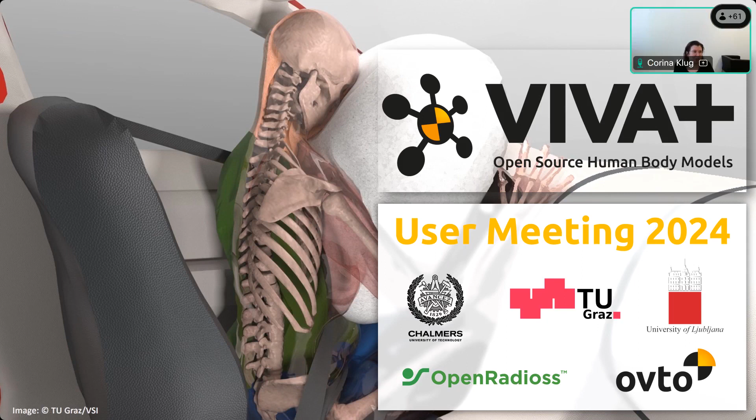So also welcome from my side. It's great to see so many of you in this meeting. What we have prepared for today is, at first, we will give you an introduction into the VIVA Plus models and the basic ideas behind them. Then we will show you more about the infrastructure around the models, especially the VIVA Plus validation catalog and OpenVT. Then you will hear some updates from the VIVA Plus developer team on new validations and also upcoming updates of the models for the next release.

After a short break, we will go more into applications of the VIVA Plus models with presentations from OpenRadioss on the VIVA Plus simulations in their open science framework. Then we will hear from Karin Brolin about the application of the VIVA Plus models for equestrian safety, and from Manuel about a comparison on average male and female response in frontal crashes. Christoph will then talk about e-scooter injury risk with focus on passenger car collisions. Unfortunately, we had to cancel the last presentation on the muscle model for injury evaluation.

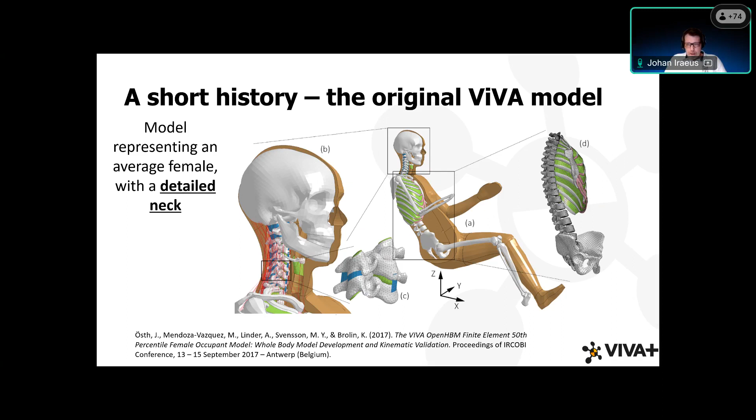If we then swap to the VIVA Plus models, when we started that, we kept the cervical spine because that was a good model, but basically threw away the rest of the model and remeshed everything. So here instead, the focus is on all of the body and injury risk across all of the body. But I will show you in the coming slides that we have some special focus on some body parts also for this model.

As with the original VIVA model, we are focusing on the vulnerable female population. And one way that we do it is that the base model in our development is an average size female.

All the validation, the post-processing tools, and the documentation are licensed as open source, and you will see more about that in later presentations.

We have detailed skeletal models that enable tissue-based injury criteria. What we mean by tissue-based injury criteria is that we look at the stress or strain in the tissue, which could be bone or something else, and try to relate that stress or strain to injury risk, compared to something you have in a crash test dummy, like an accelerometer or force transducer, where you use force or acceleration to evaluate injury risk.

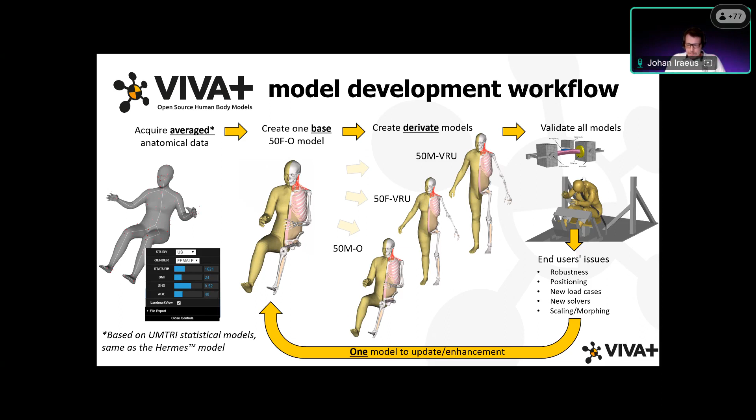Also the bones are based on statistical shape models of females and males. So when we morph from a female to a male, we also take into consideration any statistically significant differences between males and females.

We have some body parts that we care more about than others when we evaluate injury. One of these is the rib cage, so here we have a detailed rib cage. The ribs share the same modeling strategy as the SAFER HBM, so you would get similar results for rib fracture risk - not exactly the same, because we have different modeling of the internal organs and soft tissues, but they share similarities, whereas the costal cartilage and sternum are modeled slightly differently.

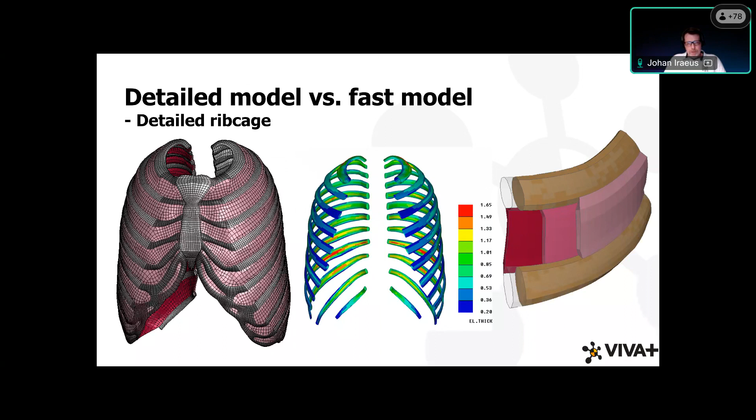Another area of interest is the lower extremities. If we start looking at the right side, we have the model of the femur, and here we are not using shell elements for the cortical bone - instead we're using solid elements. As the cortical bone in the femur is quite thick, we can afford to have 3 solid elements over the thickness.

The spongious bone here is also modeled with solid elements, as you can see, the brown one. And something else I can mention, we are using a pure hexahedral mesh here, so we don't even have penta elements here. We have spent quite a lot of effort on doing this mesh.

The upper extremities are modeled in a similar way as the lower extremities, but here the cortical bone is a bit thinner, so here we can only have 2 elements over the thickness. And obviously, I think all of you know that the time step of the model is what sets the number of elements we can have over the thickness. And the current time step of the model is, I think, 0.4 microseconds or something like that. So it should be quite similar to what is used in the industry.

One difference here is that for the upper extremities, we don't really have any validation, because that was not the focus of the VIRTUAL project where most of this has been developed.

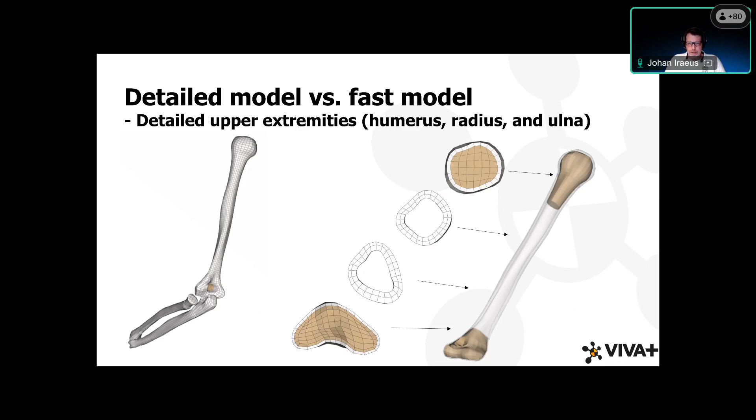To do repositioning of models, and also to do positioning of the model into a vehicle environment, for example, we have metadata both for PIPER and for ANSA. The metadata for PIPER you can find on the OpenVT platform, which we will show you where to find later. When it comes to metadata for the ANSA preprocessor, you can ask for that from your local ANSA supplier.

We have, as I said, spent quite a lot of time on meshing to ensure a good mesh quality. We have a set of element criteria, and 100% of the elements fulfill these criteria. And that is both for the baseline model, the 50th percentile seated, but also for the morphed models. So after the morphing to the derivative models, we spend some time fixing the element quality in those models to fulfill all the criteria.

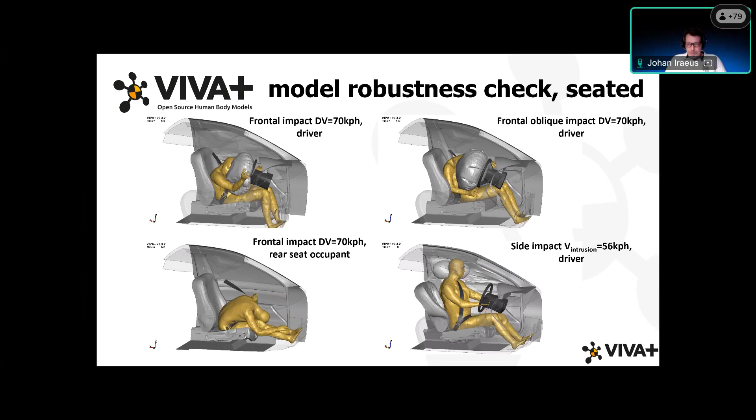Going down to the lower row to the left, we have a frontal impact, still a frontal seat, but this kind of mimics a rear seat. So we have removed the contact with the instrument panel and the airbag. Also this is 70 kilometers per hour. And then we have a side impact with an intrusion speed of 56 kilometers per hour. And we always run these robustness load cases for every small change we do to make sure that we haven't introduced anything that makes the model unrobust.

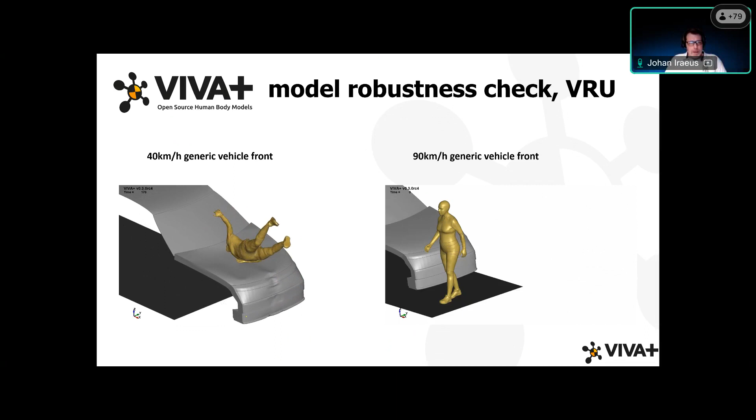Then we also have the robustness check for the standing models. I only showed you one model in the previous slide, I think it was the female, but obviously we run it for both the female and the male model. So here we have a 40 kilometers per hour impact to a generic vehicle, but we have also pushed this model all the way up to a 90 kilometers per hour impact, which is very severe. This one actually sometimes crashes, but very late, around here, so very late in the sequence.

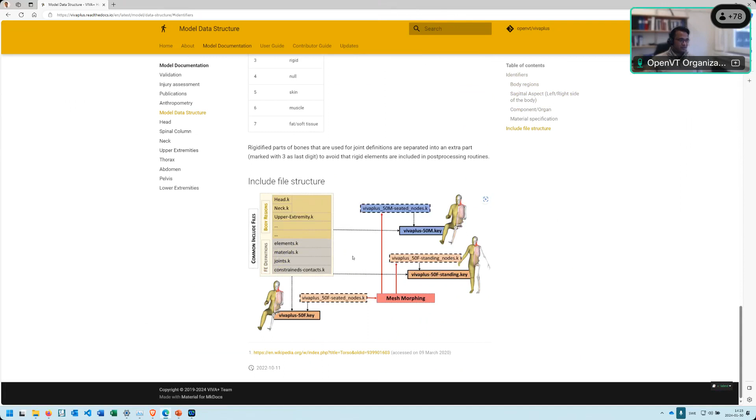And the files are structured so that all the models share most of the files as common include files in LS-Dyna. If you go back to the home page, this is where you can download the models. I downloaded just before here, and this is what you would see when you download. You would have a folder called model, where you can find the 50F seated, 50F standing, and the average male seated and standing. To show you the file structuring, if I open the seated female, we would have a main file called VIVA plus 50F key, and the nodes corresponding to that.

As I mentioned, there's a common folder which holds all the other definitions of the model, and these definitions are shared among the standing, seated, and all the other morphed models. Johan mentioned the pre-processing. This is where we hold the metadata for PIPER and so on. And in the post-process, you would find the metadata you would need to perform calculations with the dynasaur library.

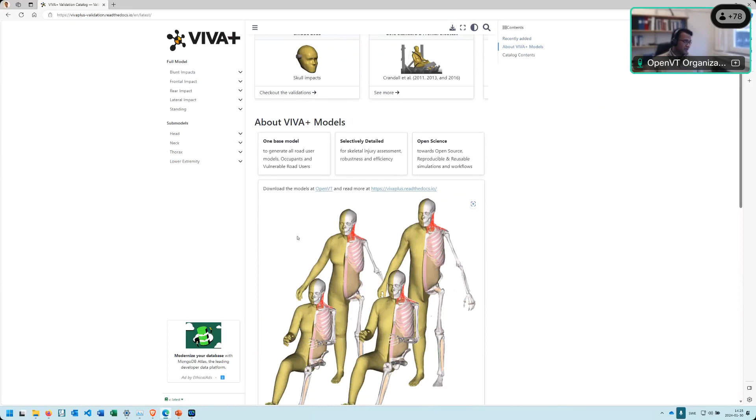Coming back to the documentation, if I click on catalog here, it takes you to the validation catalog, which is also published on Read the Docs, similar to the common documentation. We built all our validation using Jupyter notebooks and have them openly available on OpenVT. So we'll click this link. It takes you to the repository on OpenVT, where we keep all the validations and also the models. And here, if you click catalog, you'd find all the load cases we have.

Let's take, for example, one that Johan will be showing us later, the frontal impact experiments. You would find the corresponding files here, Crandall 2011 frontal. We've structured it so that the environment is in this folder called env, and the Dynasaur files and associated files are under Dyna. Here we have one folder each for female and male. If I click the female 50F and open the main file, you can see it refers to the environment files and all the other definitions here in the folder.

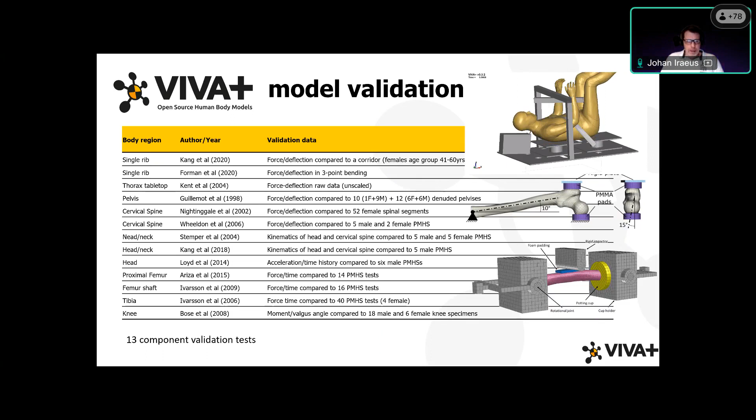So we have divided here the validation load cases in what we call component validation load cases, where we have either an isolated body part, as you can see here, for example, a femur, or where we exercise only a limited part of the model, as we do here with the Kent tabletop that you can see in the top, where we pull a belt across the chest. We have 13 of these component validation tests. And then we have full body validation tests. We have 15 of these, where we basically exercise the whole human body model at the same time.

Here we can also see some details how these validation setups are modeled. So in all cases, if we need to reposition the model, we do that during the first 300 milliseconds. We also have a critical damping at that time. And then we ramp down the damping from 300 to 350 milliseconds. And then from 350 milliseconds and forward, we apply the crash pulse. So here we have a couple of examples, one frontal impact and one side impact.

So let's have a look at the validation load cases in the final format. And this works really bad now in the presentation mode. So the Jupyter book that Jobin showed earlier, let's go in and check some of the validation load cases here.

So I click this link, and then we get here. So we can see here we have some recently added. We have the gold standard that we saw an animation of in the PowerPoint, and the near side sled test, that was the other animation. So I will show you these 3 tests. If we start with this one, the gold standard 2.

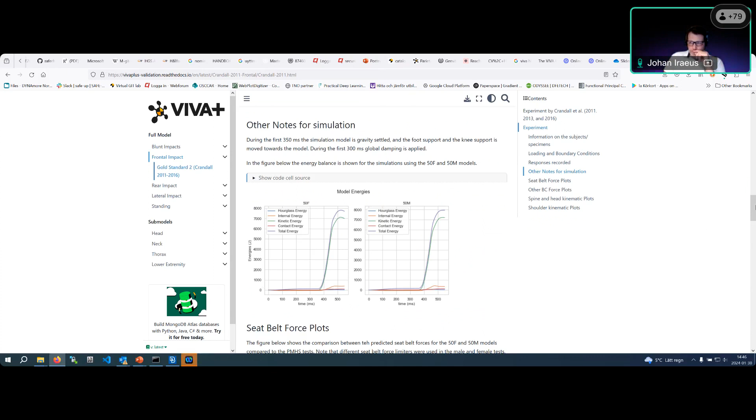Then typically the first section of the result is the model energies, so we can check that they look reasonable, so we don't have an error when we rerun it. In this case, the output data, we have the seatbelt forces, so that would be the external forces. And typically we use red colors for the 50F, the average female, and blue colors for the average male. And then correspondingly here we have the test. We have 2 tests with female cadavers and 2 tests with male cadavers. So they are also red but dashed and dotted.

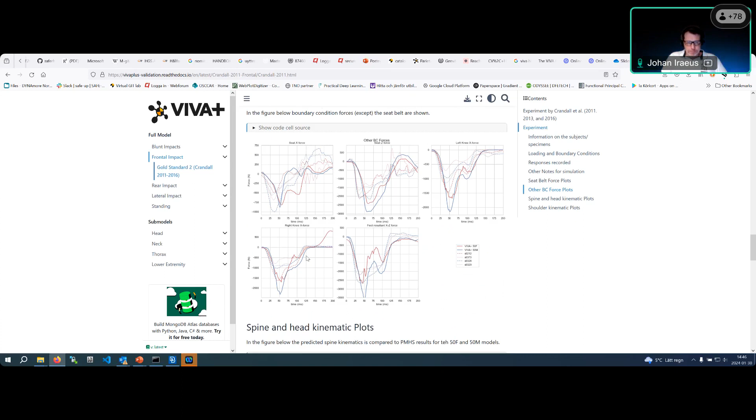So then we can compare, and here we can also see in this setup, they used a higher force limiter level for the males than for the females. So it's actually a combination of 2 studies that we are presenting together. So we have seatbelt forces, we have other boundary conditions like seat force, X force. We have knee impactors, so we have the knee forces and the feet. So after that, when we have ensured that we have reasonable representation of the boundary conditions, we can look at the kinematics.

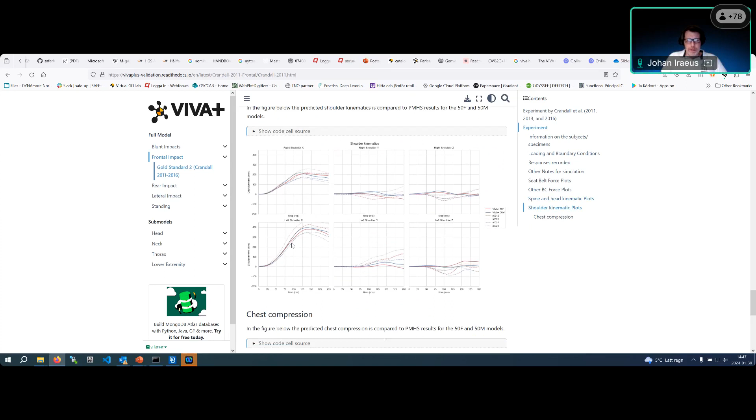So here we have a comparison of the predicted kinematics, in solid lines, with the kinematics from the tests. And here we have different levels of the spine, the head and the spine. And then in the second plot, we have the left and right shoulder in X, Y, and Z. And then finally, in this data set, we also had Vicon markers on the chest, so we can also compare the chest compression. So the orientation of these plots corresponds to the orientation of the Vicon markers. So that is the validation for this.

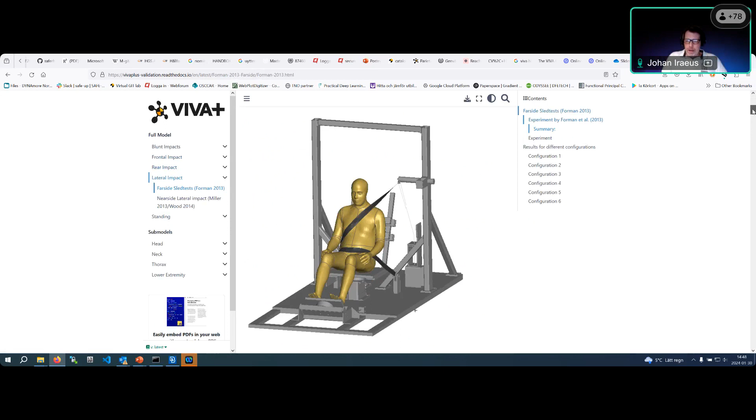We can go to the next one, which is a rear impact. We are not going to look at that actually. We will move here to a far side impact. Similar layout here. It's another setup. So far side, so the pulse is directed so the occupant will move lateral or oblique, lateral oblique in that direction. And here 6 different configurations have been simulated. And those are similar to what has been reported in the literature with other human body models.

We have some information about test cadavers. Again, we look at the model energies, and then we compare the signals that we have. So in this case, we have shoulder belt force, and lap belt force down here. And then we have a lot of kinematic signals compared to the test. In this case, we have gray corridors because the validation data was only run for males, so we don't have anything to compare the female model to.

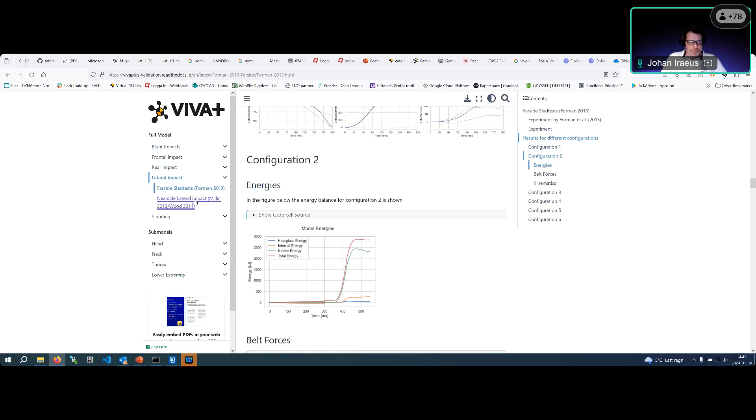Yeah, and then we have some head displacement and so on. And then we come to the second configuration. So a lot of results here. Then we can also check the near side lateral impact. Similar here, we have description of the validation load case, the loading, the positioning of the VIVA Plus models.

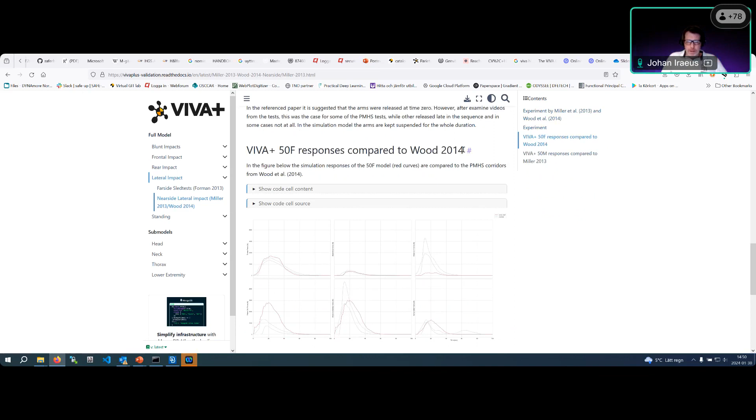In this case, we have less information from the test. They basically only recorded the force and deflection of the load cells. We can see that we have a number of load cells here impacting different parts of the body. And here we have two different tests. We have Wood 2014, where they run a cadaver test with females.

Compare here, we can definitely see here that this part, the text should be, we need to update the text here. But here we have the greater trochanter of the pelvis, and here we have the iliac wing, and we can see that they are not matching very well. The total force on the pelvis, however, matches quite well. So either the model cannot capture this distribution, or one of the plates, these impact plates, can be a bit misplaced.

And then similar for the male here in another test, that's Miller 2013. And we also had a force versus time, actually, sorry, I said displacement before.

Mate, you're next here. Yes.

Sure. In addition to all the validation cases that Johan already presented, we also have the validation for the knee joint. We did this validation based on the Bose 2006 and 2008 experimental data. So it simulates the impact of approximately 40 kilometers per hour. And these are the results of the simulation.

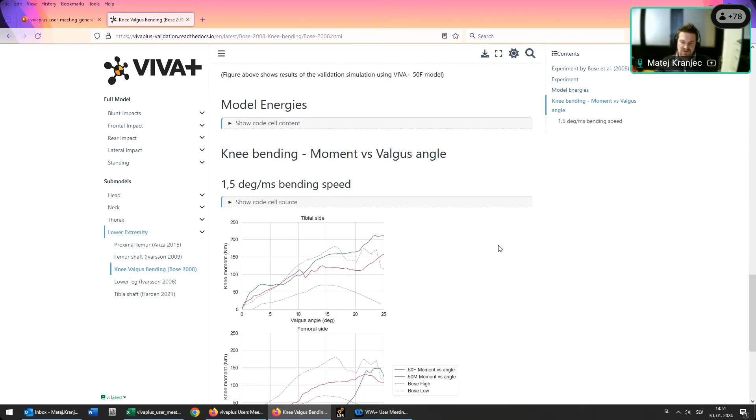So based on the kinematics, which we only have on the pictures, it looks quite similar, but also comparing the bending moment versus the valgus angle, it looks quite okay. So there is a little bit of difference if we are measuring on the tibial side or on the femoral side, but the average moment that we get from the model at the validation looks quite nice and inside of the corridor that we are comparing it to.

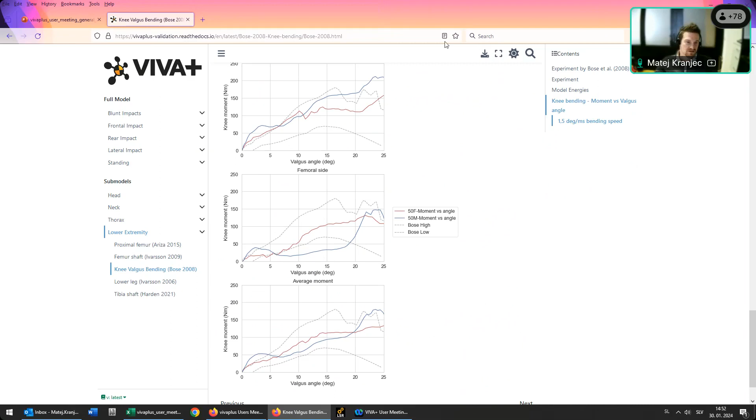But more about the validation of individual components of the lower extremity and the pedestrian load cases, I would like to give the word to Nico from TU Graz. Thanks. I will also share my screen.

Yeah, so I would like to give a short overview of the validation of the lower extremities and some full-scale pedestrian impact validation simulations. So basically, we can divide the method into two steps, one on the component level and one on the full scale level. I think Johan had also introduced us to this

two-stage validation. In the first step, we have to model the test setup where we can apply loads to single bones or extremities. And it's important to model the full affected setup in order to account for inertias and the representation of boundary conditions. In the second step, we simulate each single test with the specific displacement time curves. In most tests, these were not equal between the tests. And in the third step, we can compare the force time responses from the model to the experimental data and calculate our injury risk curves for the model.

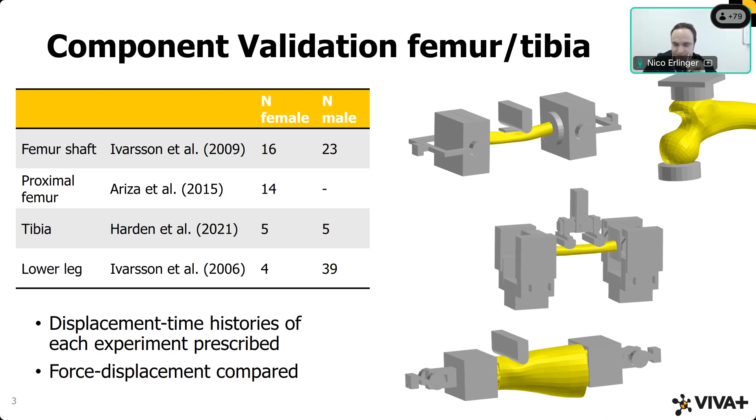For the pedestrian to vehicle impacts, we used three PMHS studies where Paas included one female and four male subjects with a vehicle front of a Renault Megane. Forman conducted three tests with a generic sedan-shaped buck, and Snedeker had done five tests with a generic vehicle front.

Prior to the impact simulations, the VIVA Plus models were positioned based on an equal angle approach, and some basic anthropometric scaling was applied, taking the height and weight of the PMHS into account, as presented by Paas in 2015.

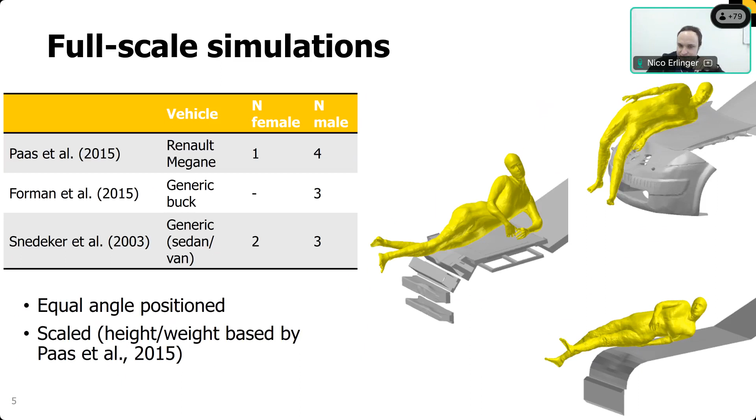On the full scale level, the kinematics of the VIVA Plus model were found to be in reasonable accordance with the experimental results. I've put some examples here for the head trajectory for test number five by Paas. Overall, a fair correlation was obtained by the objective ISO rating score for the simulations from Paas.

I've also included a diagram of the kinematics of the head and the pelvis of the replicated tests by Forman.

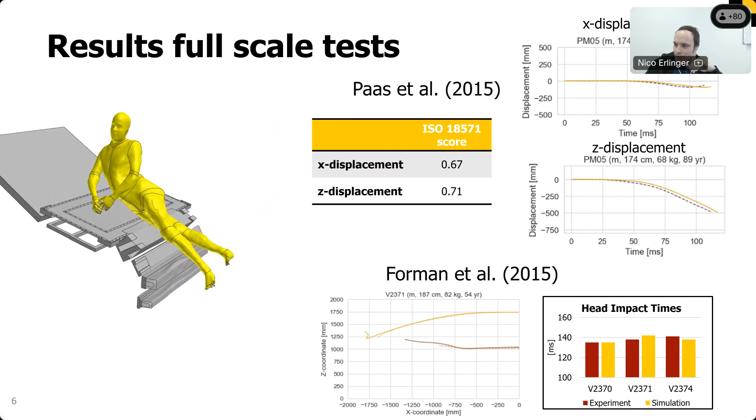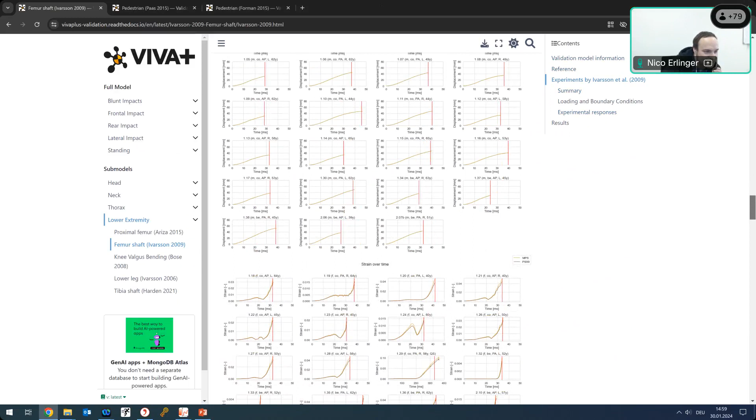I also would like to do a quick change to the VIVA Plus validation catalog. They are all singly replicated tests with force-time curves, CORA curves, and strains in there. Finally, we get our injury risk curves. And also for the full scale validations, we have all our simulations in this catalog.

That should be all from my side. So thank you.

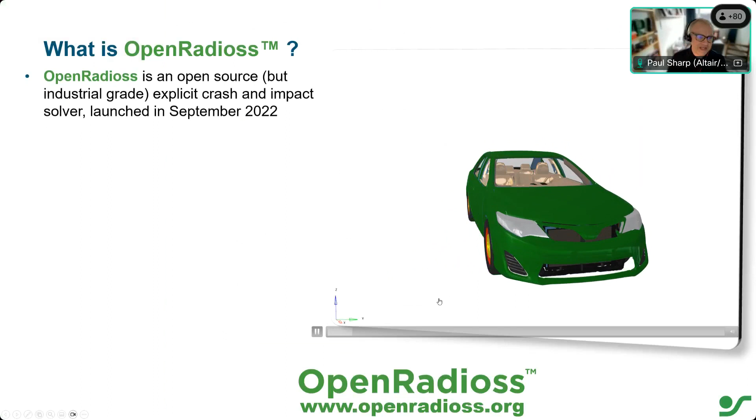So what is OpenRadioss? Maybe some of you have already heard of it, but you can probably guess from the name that it's an open source version of the Radioss crash solver. Johan already spoke to us a little bit about what open source means, so the VIVA Plus body models are an open source body model. OpenRadioss is an open source explicit crash code, but it's what we would call industrial grade. It's built from basically the same source code as the Altair Radioss solver, and it was launched as an open source version in September of 2022.

As Johan discussed, this is a very similar structure to VIVA Plus. It has publicly accessible source code, so you can view it, modify it, and enhance it with your own changes. There are also pre-compiled packages available as executables, released daily for both Windows and Linux, in single precision, double precision, MPI and SMP versions. If you don't want to get involved in modifying the code, you can just download it and run it.

There's an active community of members across both industry and academia, all committed to improving the code and driving innovation. Several research advancements and best practices are shared via the GitHub forums for the project, and we also have our own virtual and in-person user meetings. We have a steering committee of members across academic institutions and industry, including industry gurus, who are guiding the development of OpenRadioss to meet the latest challenges facing users in industry today when running an explicit crash code.

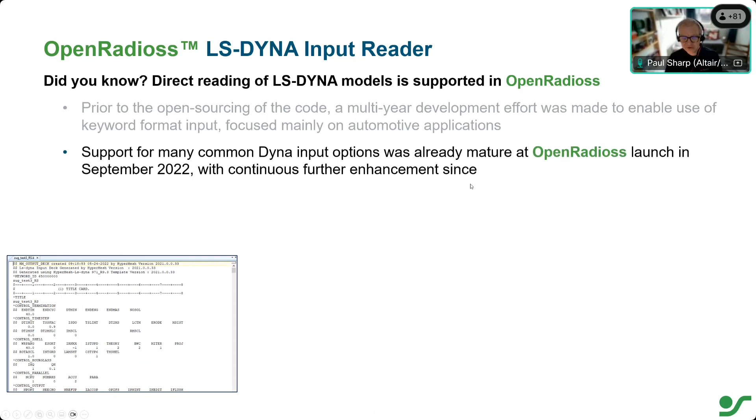One aspect that even if you've heard of Radioss or OpenRadioss you may not be aware of is that it's actually capable of reading and running LS-Dyna format models as they come, as a key file, a .k file. This was available even prior to the open sourcing of the code. It was a multi-year development effort made by Altair to enable use of the keyword format, focused mainly on automotive applications, the most commonly used materials and properties in that field. Support for many common Dyna input options was already mature at the time of the OpenRadioss launch, and there's been continuous further enhancement, including contributions specifically aimed at helping what we're talking about today.

There are a number of publicly available vehicle example models you can find from NHTSA, for example the Taurus, Neon, Yaris, Camry. You can just take those Dyna input format models and run them in OpenRadioss right now, with no changes to the input. We've got some examples on the OpenRadioss Confluence pages, including links to those, but also other Dyna format examples like this simple tensile test shown here.

If you have access to the Altair Radioss reference guide, it serves as the reference guide for OpenRadioss too, because the solvers are basically the same. Within that, there is a list of the supported LS-Dyna keywords.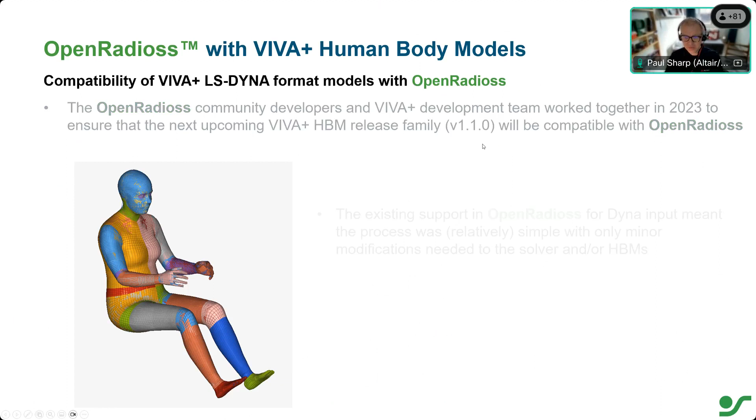So, using OpenRadioss with VIVA Plus human body models - the community developers at OpenRadioss, along with the VIVA Plus development team you've already heard from today, worked together over the last 12 months to ensure that the next upcoming HBM release family, version 1.1 as it stands, should be fully compatible with OpenRadioss. By that, I mean the Dyna input format will be compatible with running in OpenRadioss.

As I've already mentioned, we've done a lot of work to support Dyna input in OpenRadioss, so that process was relatively simple. Some enhancements were made to OpenRadioss based on its behavior with the VIVA Plus HBMs, adding some material and property support and making modifications here and there. Also on the VIVA Plus side, they collaborated with us to make sure the modeling choices made in the next release were best suited to working with OpenRadioss. As I've mentioned, we don't necessarily support every Dyna input format, so there were a few changes to sensors and functions to ensure the model would work cleanly with the OpenRadioss solver.

So how do you do it? How do you run your VIVA Plus HBM in OpenRadioss? I've got a very short video here where I've already downloaded the VIVA Plus test suite - we've seen that in the validation tests. Here we've got the seated 50th percentile female with the Kroell sternum chest hub impact, and we can see we've got the keyword format file there.

I've opened the OpenRadioss GUI, which is available from our Confluence pages. I pick the keyword file up, and I'm running single precision here, though double precision is also available. I'm picking my number of processes, so here running in 4 processes MPI. Add the job - okay, so this is just an existing Kroell 1971 validation test. It comes into the solver window, and we can see it says right at the start that it's reading an LS-Dyna input format model. We get a bunch of warnings, but we don't need to worry too much about those.

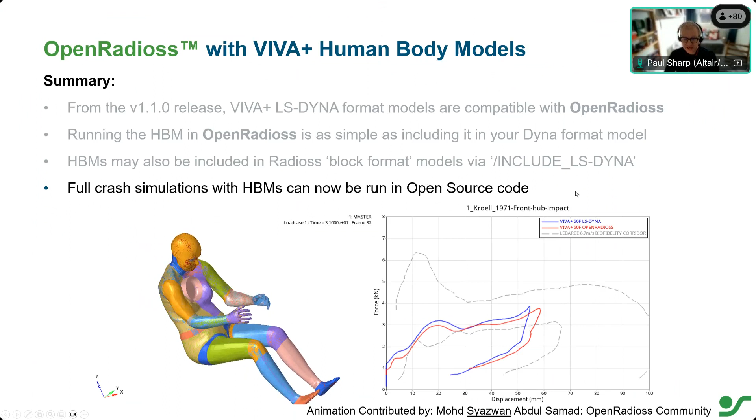But now you can run full crash simulations with human body models in open source code. And just one final slide here.

This was actually done by another member of the community, where Johan said the one case that had been run is this one. So Mohd from the OpenRadioss community ran this and compared it with Dyna using the available Dyna results, and you can see that we get reasonable correspondence there with no specific modifications to the model, and the dotted lines are the biofidelity corridor, and you can see that both the Dyna and Radioss results are very similar in that regard.

And obviously there's more validation to be done, and I think we'll continue working with the Viva Plus team to do that.

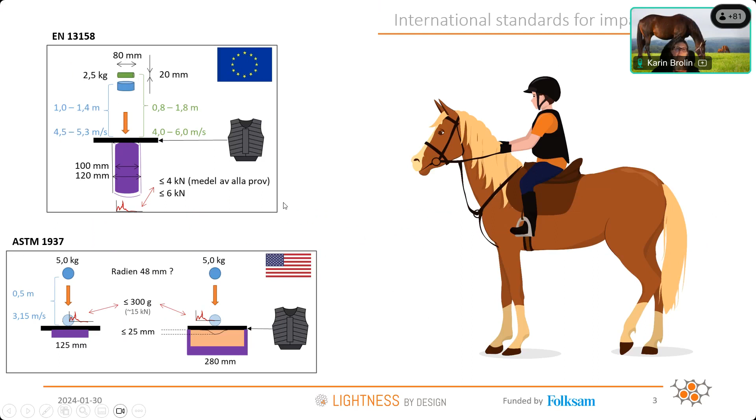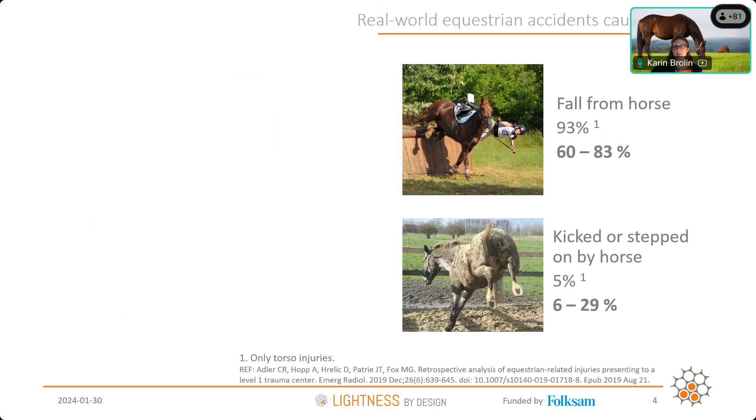But then we need to know also, of course, what are the accidents causing injury. So I looked a lot into different publications, but also into accident data. And we can see that falling from the horse causes the majority of the injuries. But people are also injured when they are kicked by a horse or if they're stepped on by a horse. And sometimes people fall from the horse and then they are kicked or stepped on, so there could be a combination of these also. So the question is then if there's any correlation between the accidents that occur causing injuries and these standard tests.

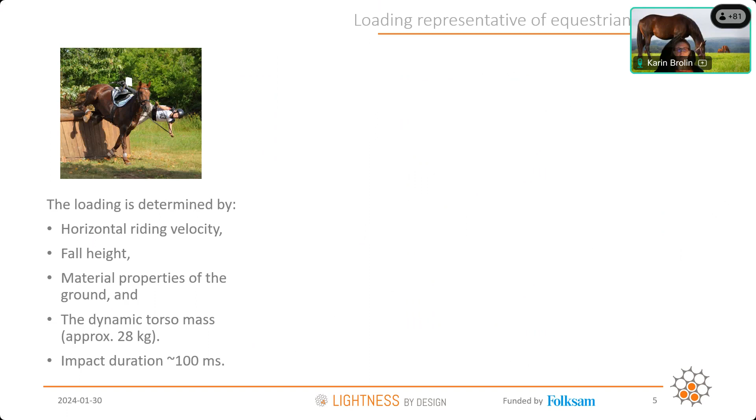So if we look at the loading in a fall accident, it's determined by, of course, the riding velocity, the fall height, the size of the horse, and the size of the rider, and of course the material properties of the ground that you're landing on. And then the dynamic mass of the torso, which is approximately 28 kilos for an average size female. And we have impact durations of around 100 milliseconds in these kinds of accidents.

If we look at being stepped on by a horse, there's no study showing any data of horses stepping on people or people-like materials. So I just took data on the force walking in different gaits on ground. And we have a spread from 2.5 to 14 kilonewtons under each hoof, and the maximum force occurs approximately after 150 milliseconds. And for being kicked by a horse, there's a study where they had a measuring wall installed in a stable. They measured up to 2 kilonewton forces with very short impact durations. The longest one was 50 milliseconds, but most were below 20 milliseconds.

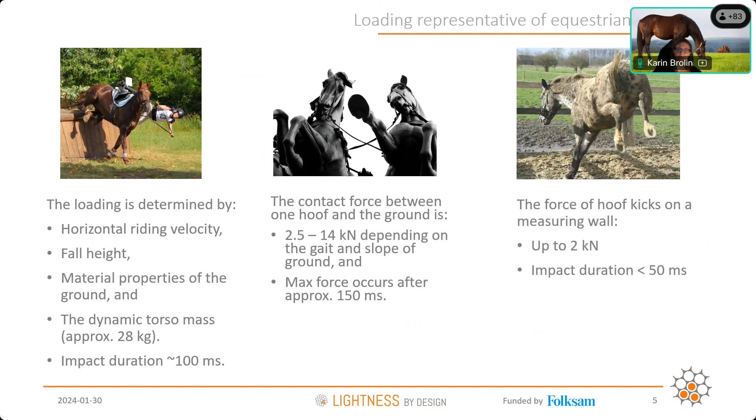So I did a simulation study trying to simulate some of these loadings. I used the VIVA+ average female model in LS-DYNA and looked at thoracic injuries by evaluating the dummy-type criteria, like the compression criterion, and the viscous criterion for soft tissue injuries. But I will focus here on using the strain in the ribs with age-specific risk curves coming from a publication by Larson. This is work from Chalmers that Johan, I think, mentioned briefly in the beginning. And here's an example of the risk curves. The ages I picked were 25, 45, and 65 years.

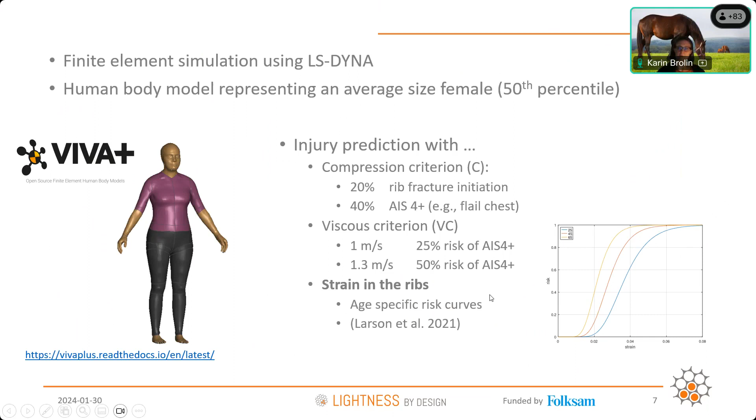And then I created a very simplified model of an equestrian safety vest. Essentially, it's an ideal safety vest because it has perfect fit. It's based on the geometry of the external surface of the VIVA model, so you could never put it on or take it off. It has a thickness of about 2.5 centimeters, which is measured from equestrian safety vests in the stores in Gothenburg. And we estimated material properties from literature for the energy absorbing foam material. And then we added an external and internal surface of nylon-type material.

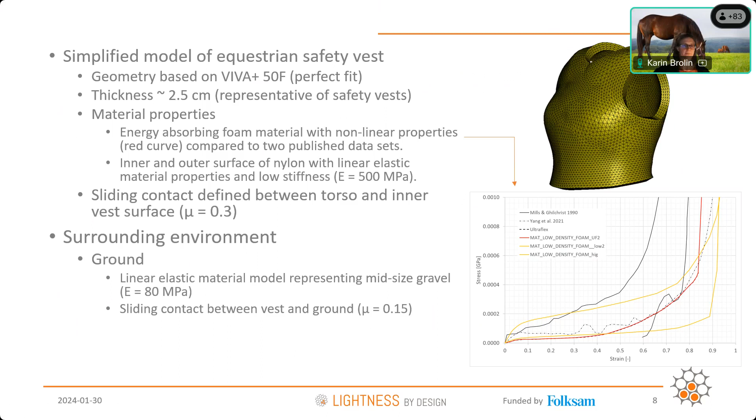And then between the VIVA model and the vest, we have a sliding contact surface. In the surrounding environment, we have modeled the ground, representing a mid-sized gravel stiffness. And there's also a sliding contact between the vest and the ground. And I have also modeled jump rails or fences with wood material properties.

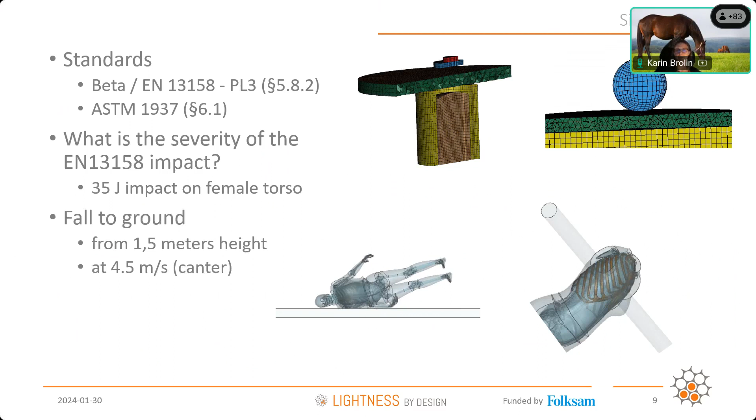So the simulations I ran were, first, I simulated both the standards. So that's the European standard, and this is the American standard. And then to get an understanding of what the European standard meant in terms of severity, I took that impactor and loaded a female torso. And then I simulated a fall to the ground from approximately 1.5 meters height in canter speed, which is about 4.5 meters per second if it's a slow canter.

And then instead of landing on the ground, people typically fall off landing on fixed jump rails or fences. So here I took the two different canter speeds, the lower speed of 4.5 meters per second and a higher of 9 meters per second. And I just used the chest model, not the whole VIVA model, to save computational time.

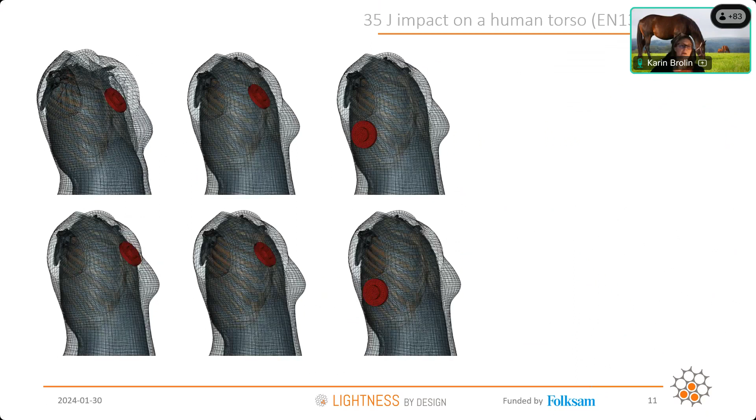And here again is just only the chest model with the impactor from the European standard. So it's mid-sternum impact, and then an offset impact and the lateral impact. And I did not predict any fractures for any of these load cases, so it's not a really severe loading. So instead, I thought, okay, what if we increase the impactor so that it somehow represents the dynamic mass of a torso? So instead of being 35 Joule impact, it's a 350 Joule impact.

And now in the mid-sternum impact, we predict no fractures for the 25 and 45-year-olds, and for 65-year-old, I predicted 0.1 rib fractures, meaning if we had 10 identical 65-year-olds, one of them would have a rib fracture. And the offset, we see more fractures, so half of the 25-year-olds would have a fracture. For 45-year-olds, they would on average have 1 rib fracture, and the 65-year-olds would on average have almost 2 rib fractures. And for the lateral impact, it's still a little bit worse loading.

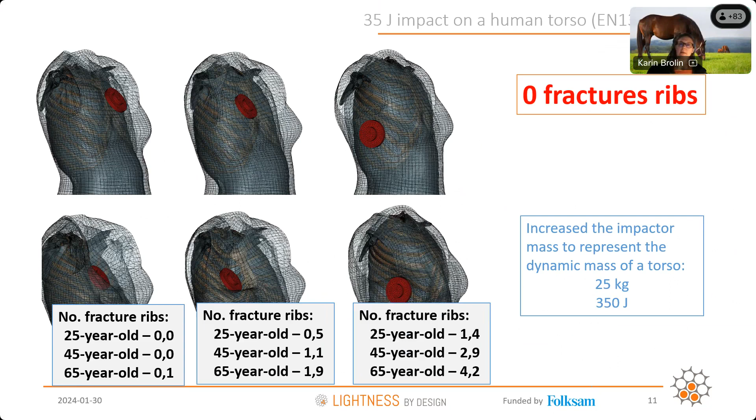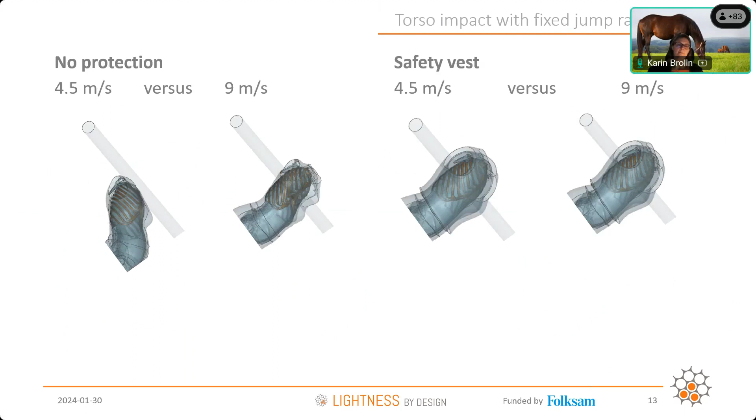And here we have the torso impacts for the fixed jump rails or fences. So the two left ones are different canter speeds, 4.5 and 9, and without the safety vest. The two to the right are with the safety vest. So here it's just inertial loading from the speed of the torso going into the jump rail. And here we see for the lower speed, we predicted no rib fractures, but for the 9 meters per second canter speed, we predicted rib fractures for all the different ages. And with the safety vest, that rib fracture risk decreased a lot. So for the 25-year-olds, from on average almost 4 rib fractures to 1.

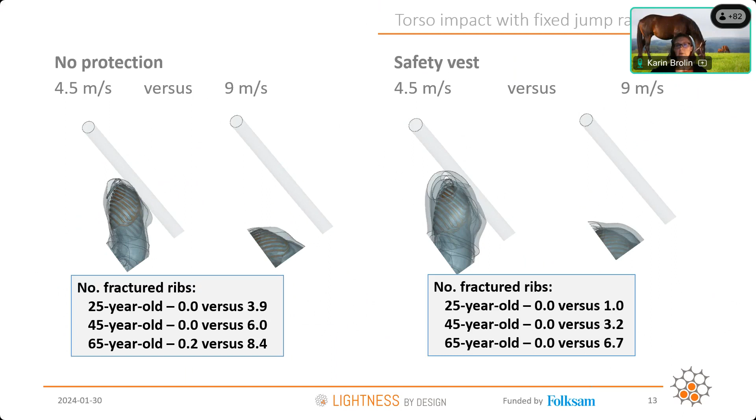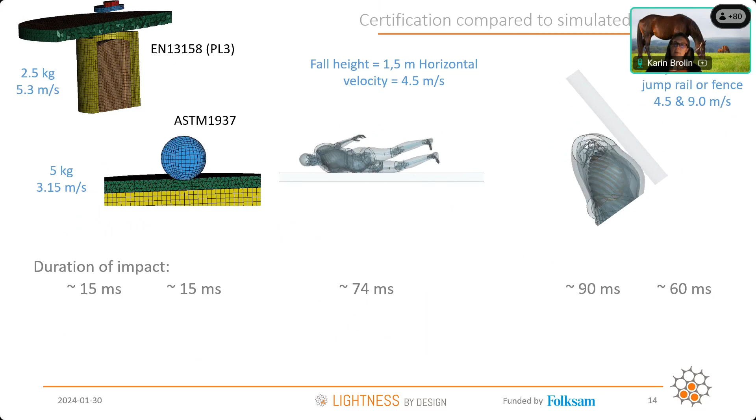So then the question is, the certification testing, the loading, which was the aim here, is it comparable to the accidents that we simulated in terms of loading of the riding vest? So the duration of the impact for the standard certification testing, it's about a 15 millisecond long force curve in time. For the fall, in this case, 74 milliseconds. For the jump rails, the lower speed 90 milliseconds, and the higher speed is a 60 millisecond duration impact. So we can see here that the certification testing is not really representative of these fall accidents that I simulated.

And if we look at the maximum compression of the vest itself, for the certification testing, the European was a 60% maximum compression. The US was 82%. In the fall accident landing on ground, we only had 38% compression, so much less. The 9 meters per second impact on the rail was the one that was closest, at 85% compression.

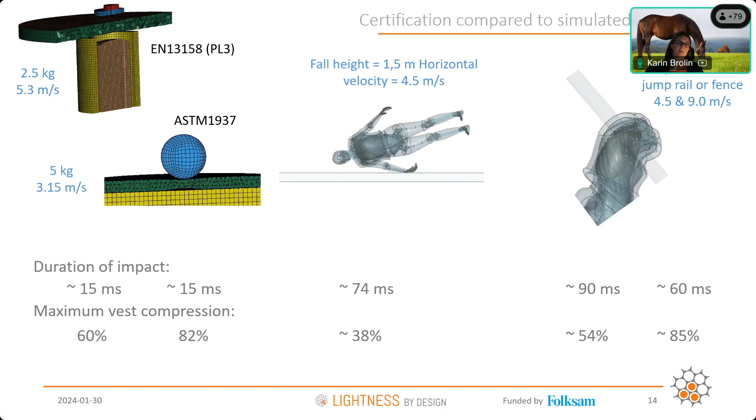So then, as a sort of summary, most of the torso injuries in equestrian accidents are caused by fall accidents. And if I look at the European standard and apply it to a female torso, it does not cause rib fracture. So I don't think that testing really predicts whether that is a good vest to protect from rib fractures or not. The impact duration of 15 milliseconds in that testing is representative of hoof kicks, but it's much faster than the impact duration of 100 that's representative of the fall accidents. And the impactor mass of 2.5 kilo is about 1/10 of the torso dynamic mass.

So then the question was, is the certification testing representative of loading in real world equestrian accidents? And our answer is no, it is not. So we are now working on a continued project where we will be using the VIVA Plus model to come up with good novel certification testing that could be more representative in terms of loading of the vest in accidents.

So shortly then, what my VIVA Plus user experience was. It was numerically robust for all the load cases that I simulated.

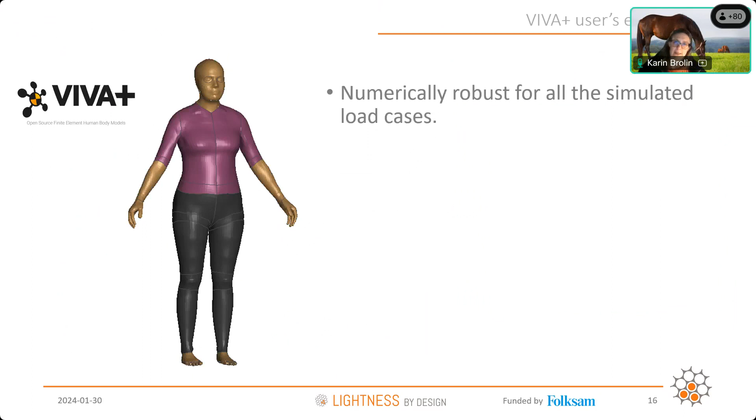A big plus for the strain-based rib fracture risk that was really useful for me, and one of the major reasons that I chose this model for the simulations.

As I mentioned, for some of the load cases I only used the torso model. And that created a little bit of headache or manual work to get the model running. It was not very easy to just remove parts, and then I got some numerical instabilities until I fixed it.

And it was not possible to run the post-processing scripts straight on to get the rib strain predictions that are supplied on the VIVA Plus web pages. So I had to do my own scripting for post-processing. But I will definitely use the VIVA Plus again, and I'm open to any questions.

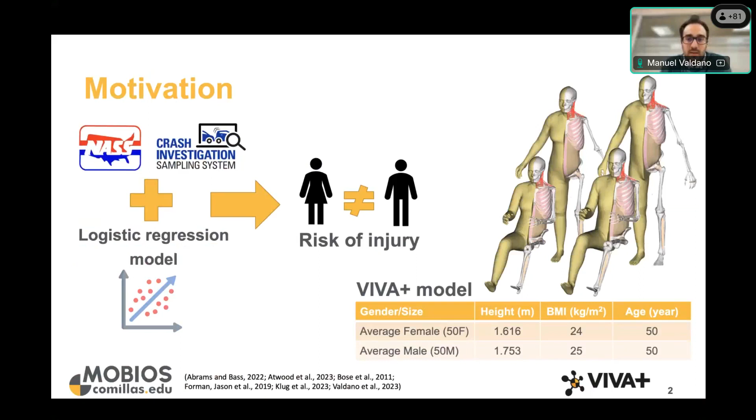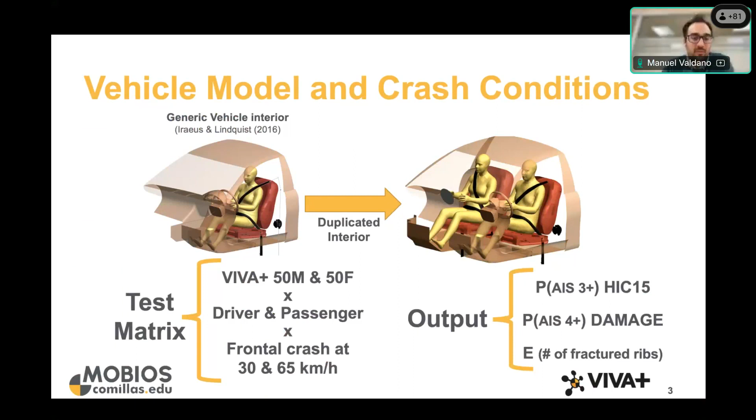Here you can see a video from the crash at 65 kilometers per hour. On the left-hand side of the slide, the female model in the passenger position and the male model in the driver position, and on the right-hand side, the male model in the passenger position and the female model in the driver position. Okay.

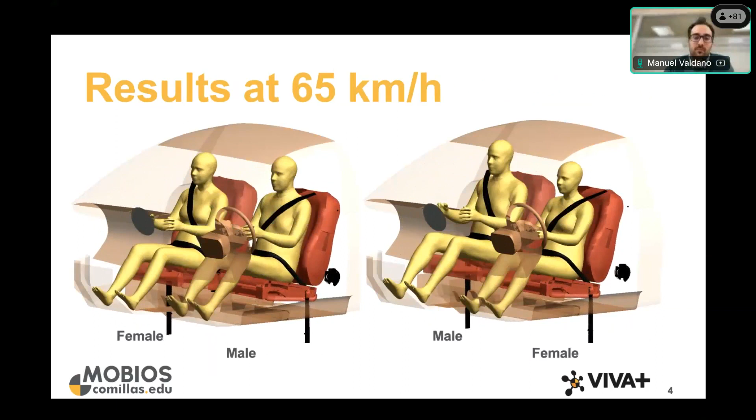Going to the results, I will just focus again on the 65 kilometers per hour simulation. On the left-hand side of the slide, you can see the probability of sustaining an AIS3+ injury from HIC, for both driver and passenger positions and the occupants analyzed. As you can see, passengers are more susceptible to this kind of injury. For drivers, females have a larger risk, and for passengers, the males. For DAMAGE, you can see a similar trend, but in this case the female driver occupant has a larger risk of sustaining an injury.

Analyzing the video from this crash, you can see in the bottom right-hand side of the slide there is a sudden rotation of the head after impacting against the airbag, resulting in this larger risk, because this rotation was not observed in the other simulations.

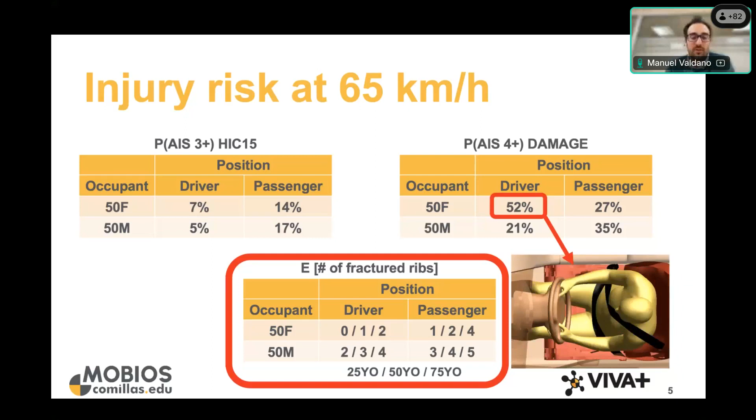And lastly, for the expected number of fractured ribs, we calculated this number for a 25, 50, and 75-year-old occupant. As you can see, this number increases as the age increases. Again, passengers were more susceptible to these injuries than drivers, and male occupants were more susceptible than female occupants. The results differ from those observed in the databases. So we are continuing this study and focusing on more anthropometries. Thank you very much for your attention, and I will be happy to answer your questions.

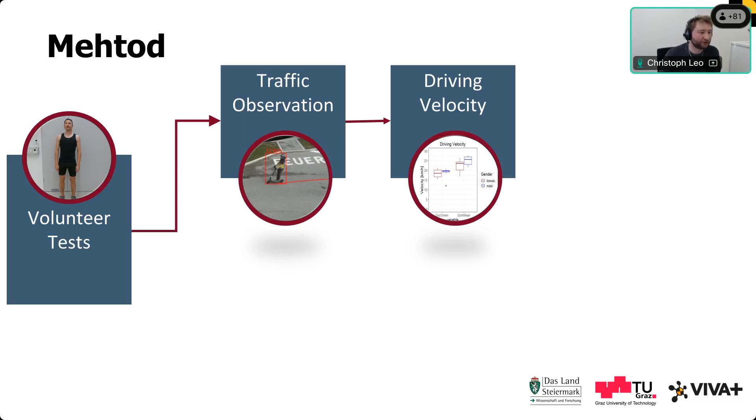To answer these research questions, we have used the following method. So first of all, we have conducted volunteer tests, and these volunteer tests we have split into two different tasks. So one task was that the volunteers were driving along a predefined road where we have a traffic observation system, and this traffic observation was used to get driving velocities of the e-scooter riders.

And then we also have asked the e-scooter riders to drive in our laboratory, where we have a motion capturing system. And this motion capturing system was then used to get the driving posture for the e-scooter riders. And this we have done for female and male volunteers. And the data we have collected in the volunteer test is then our input data for the simulations with the VIVA Plus human body models.

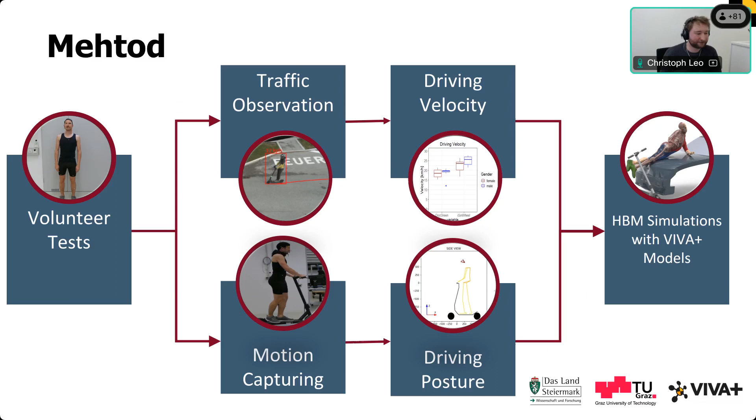Just one slide on the results of the volunteer test. I have here an example of a driving posture where you can see that the right foot is in front and the left foot is a little bit behind. And this is then our target posture for the human body model simulations. I don't want to go too much into detail on that. So if you're interested in the results of our volunteer study, please have a look at the publication of last year's IRCOBI. There you will find all the details on the volunteer test.

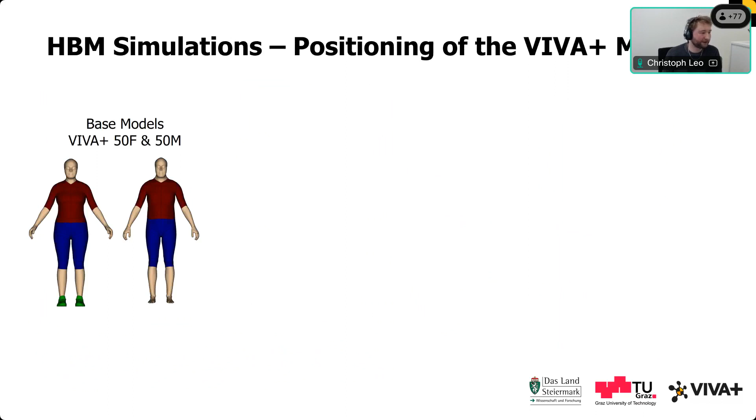For the human body model simulations, first of all, we had to position our models. So starting from the base models, the VIVA Plus 50F and 50M standing models, and the target position of our volunteer test, we have positioned them using the Piper positioning tool and have positioned them on the e-scooter models. These models are not yet on the OpenVT platform, but we will put them on there. So you will also find the e-scooter models as well as the positioned VIVA Plus models, so you can use them for your own simulations.

And that's how the simulations then look. So just an example of passenger car collisions. You can see the generic vehicles we have used and the VIVA 50M on the left and the 50F model on the right side.

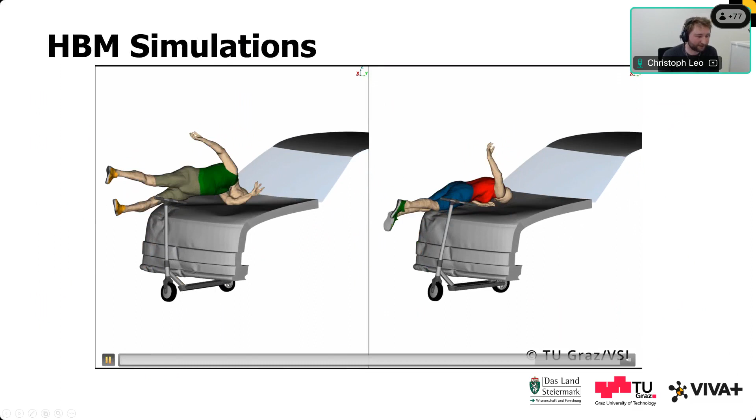Then from these simulations, we have analyzed the injury risk for proximal femur fractures and tibia shaft fractures. And as you have heard before, for these body regions, we have the injury risk specifically for the VIVA Plus models. We also have analyzed the fracture risk of the ribs, the brain injury risk, and the skull fracture risk. I just want to present some examples of the results based on the brain injury risk and the skull injury risk.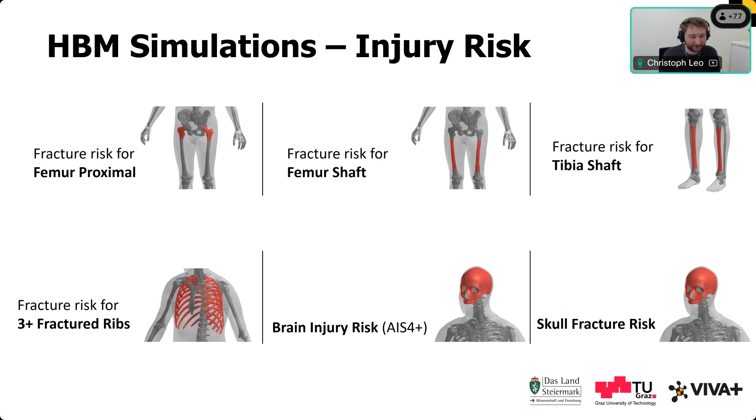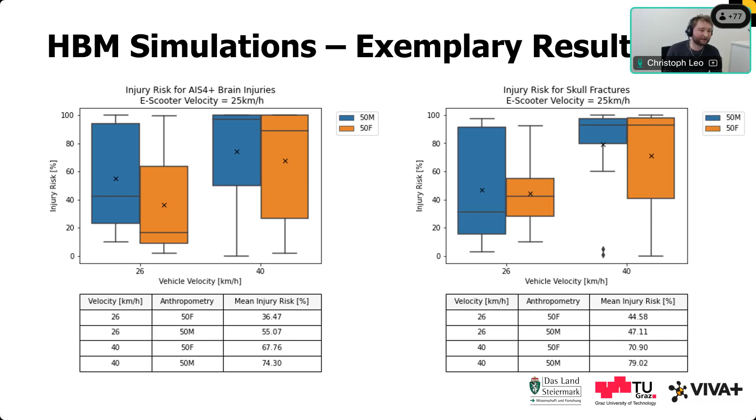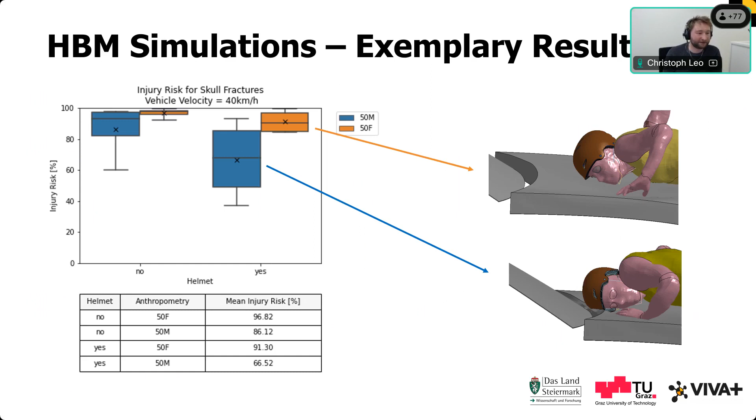This corresponds also with accident data we see. If we have a look on accident data of e-scooter accidents, then we see especially a lot of fractures to the face area. So that's something that should be investigated further in the future.

Summing up this study, we have seen that severe head injuries were observed for all kinds of accidents, so for vehicle collisions, the single accidents, and also when an e-scooter is colliding with a pedestrian. We have seen that the collision velocity of the passenger car has a bigger influence than the e-scooter velocity. When we have a look on collisions between e-scooter riders and pedestrians, we see that also the pedestrian suffers severe head injuries.

What we have also seen is that if we are reducing the e-scooter velocity, we also can reduce the injury severity in case of single accidents and also of the pedestrian. And helmets can reduce the head injury risk up to 44%, depending, as shown before, on the kinematics and if the first impact takes place on the helmet or in the facial area.

Johan. Yes. So, tell me when you see the presentation. Maybe now? Fine, we can see it.

Yeah. So this will be a presentation about the upcoming updates for version 2.0. First out is the pelvis model. We have updated the pelvis model. The geometry is the same. The mesh is the same, but we have added distribution of the cortical thickness. So the shells now have nodal thickness, which at least makes it possible in the future to look at tissue-based injury criteria. We have some validation for the pelvis, but I would say that we need some more work before we have the injury risk function that we can use together with this model.

We have calibrated some properties here. So we have basically two joints in the pelvis: the pubic symphysis and the sacroiliac joint. Pubic symphysis is the joint in the front of the pelvis. And here we have made a choice to only use solid element representation. In reality, we have a bunch of ligaments as well, but we have used solid representation and calibrated the material properties to fit to experimental results.

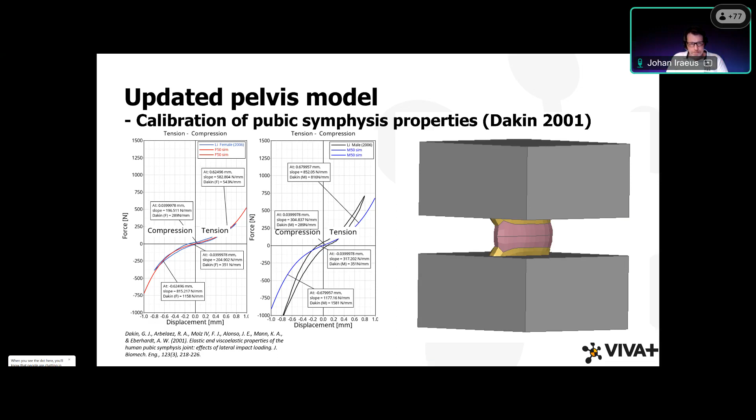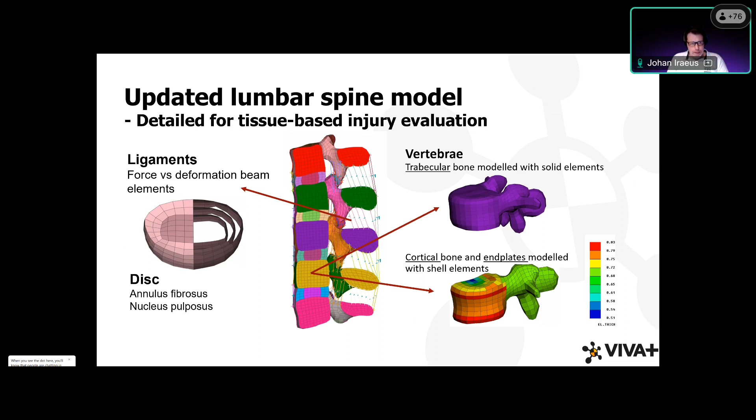We have tuned the ligaments. The ligaments are based on physical tests, but we had to tune the initial length of the ligaments. Using these two studies we could tune the initial lengths, and we've included a parameter in the model called lumb flex, with recommendations for how to set it.

We set it to 0 or -1, depending on whether it's a standing model or a seated model. That represents the initial slack we think is present in the human body model, or the actual human body as well.

For validation, we have two data sources, one from Yamamoto. Here we have flexion-extension, lateral bending, and axial rotation of the whole lumbar spine. In the paper you can also find information for each of the FSU segments, for example between L1-L2, L2-L3, and so on.

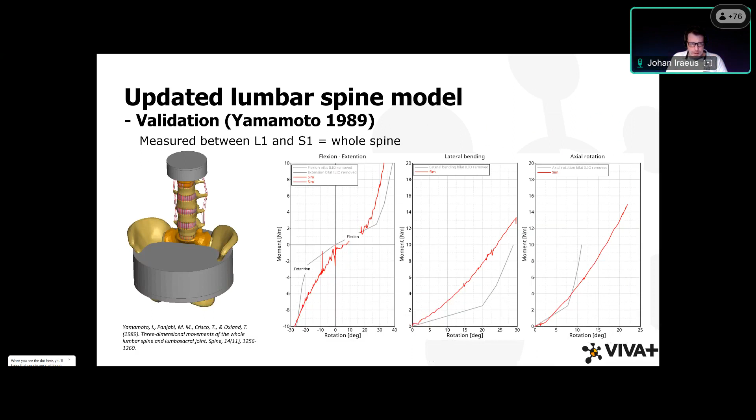Yes, over to Jobin or Yash.

Should I continue to click through the slides? Then you can talk. Yes, I think you can do that. Yash must be trying to unmute himself. We don't hear you, Yash. I can see that he's unmuted, but he is not audible. I think I can take this.

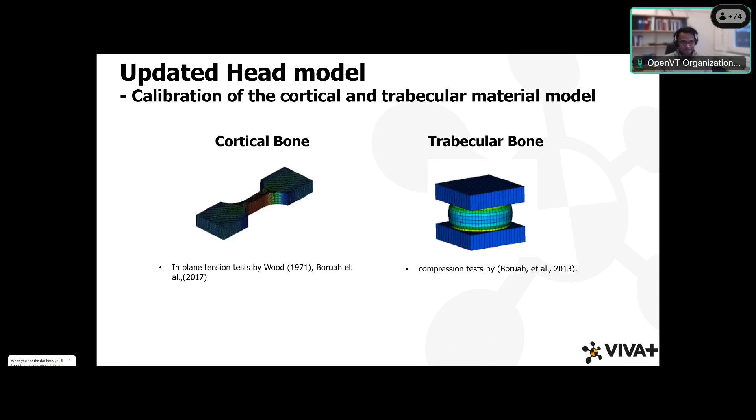And here are the calibration tests for the cortical bone and the trabecular bone. In the interest of time, I can move on to show you the validation tests, where we performed lateral impacts on the forehead, temporal impacts, frontal impacts, and also a vertex impact with the mass dropping on the top of the head.

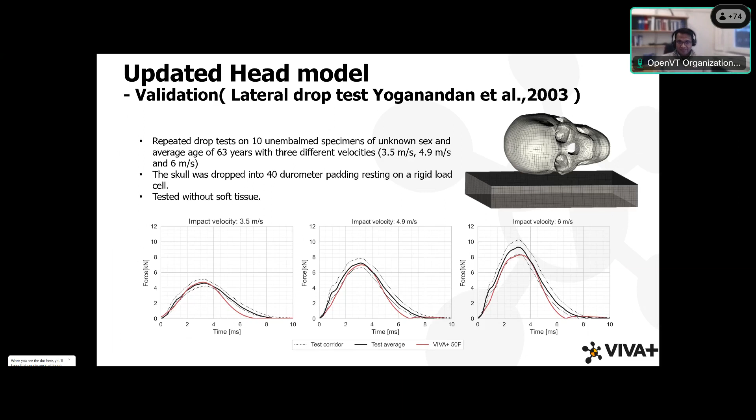Next is lateral impact with the drop, and this is only the skull without the soft tissues, again at 3 different velocities ranging from 3.5 to 6 meters per second. More details will come soon in the publication we are preparing. And with that, I'll end here. These are the big updates coming in version 2.0.0 watch out for the release later in the summer.

I can close updates from the developer team by sharing a bit more about the VIVA Plus community. We have a community where people contribute at different levels. We have users, like most of you here today, who are basic users of the model, coming from industry and university. Some of these users contribute back by reporting issues, performing model validation, or adding to our documentation. Some contributors also contribute to the development itself by fixing issues and implementing new features.

Right now we have about 9 developers off the top of my head. We also have a steering group, not necessarily associated directly with Viva Plus but coming from industry and academia, who help us prepare the model roadmap. And we have 4 maintainers who maintain this regularly with bug fixes and stability issues, and so on. So if you'd like to join, you're welcome.